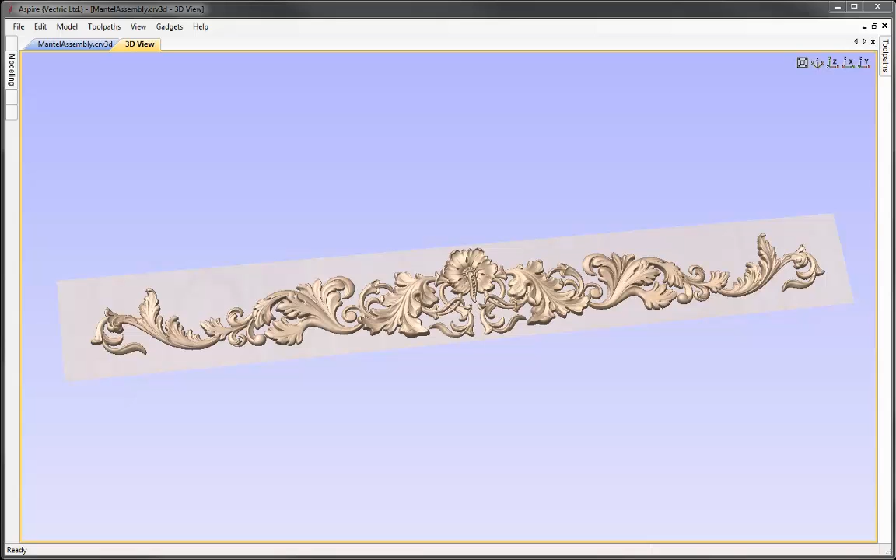So let's go to File, we'll close that, and then we'll go and create a new file. In here we're going to put in some dimensions. For my width I'm going to put in a value of 48, the height is going to be 6 inches. We're going to put Z0 off the top of the block, material thickness we're working with is going to be 1 inch. XY datum position will be in the centre of my job. Working in inches, modelling resolution I'm going to up that to very high so that we have more pixels to play with as we're working with quite a large job space. And then we'll go ahead and press OK.

So to begin this project we're going to start by importing the free clip art that comes with the software. We're going to roughly lay them out, and then we're going to look at the transformation tools to size and position those components until we're happy with a rough layout. So let's go into the 2D view control. We're going to use this option over here to tile our windows horizontally, that way I can see the 2D view at the top and I can see the 3D view at the bottom. So now we're ready to go and import our first piece of clip art.

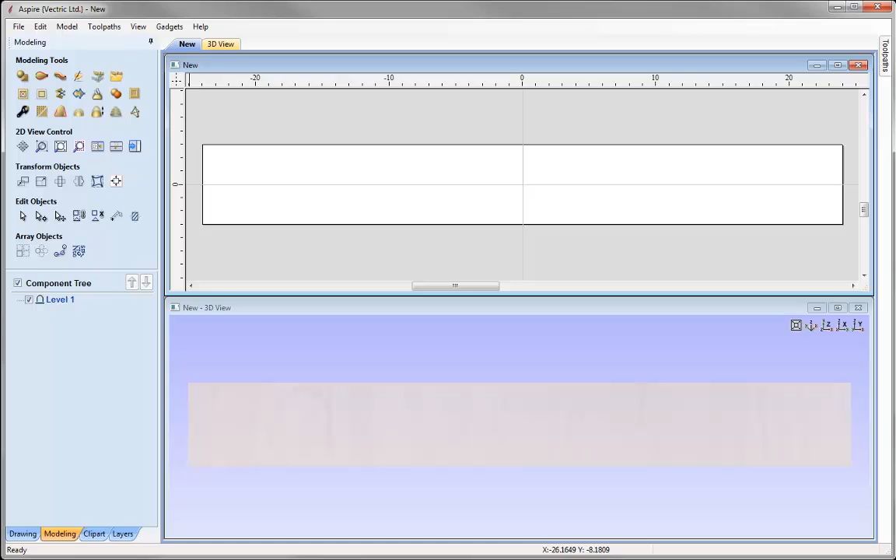So let's go into the modelling tab. There's a few ways that we can import clip art. One way is by using the import option up here and locating the required model from your PC. So let's use that option there. You can see that we're in the Mantel Assembly Files folder, and so I'm going to look at bringing in Flourish 118-57620. So let's take that and then we'll press open. You can see that's been imported into our job.

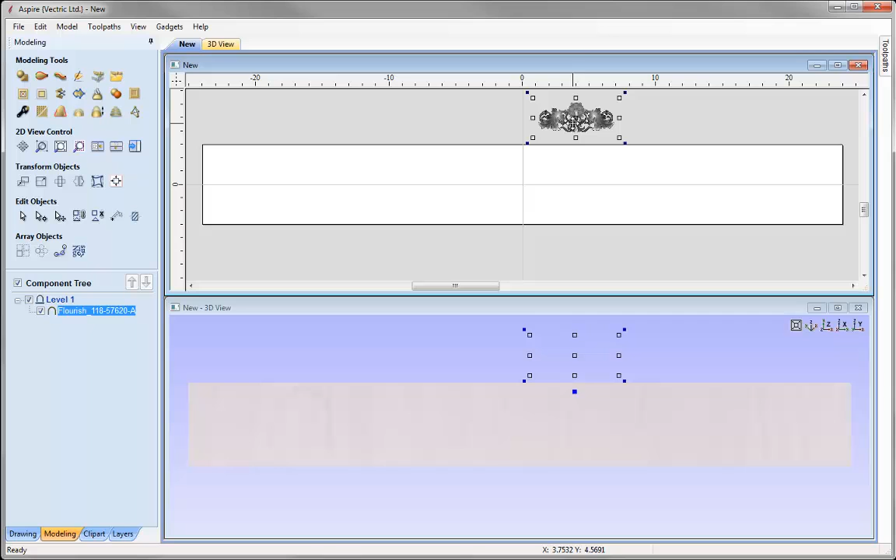So we'll take that and we're just going to put that in the centre of our material. We'll align that to the centre horizontally and vertically to the material, then we can close that down. You can see that my component's been added to the component tree there.

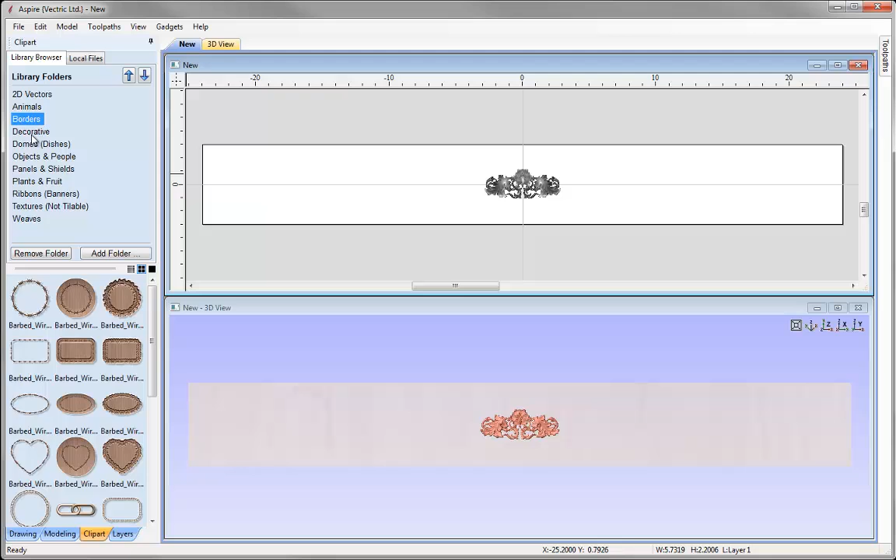Another way that we could bring clip art into our session is by using the clip art tab. So if I just select the clip art tab there, what I've done is I've already installed all of the clip art that comes with the software, and using the library browser option here and using this add folder option, I've added in all of those subfolders that are available with the software, and so I can just click through those and easily browse through the clip art, looking at the thumbnails in the lower half of the clip art tab. There's another way that you could look for your files.

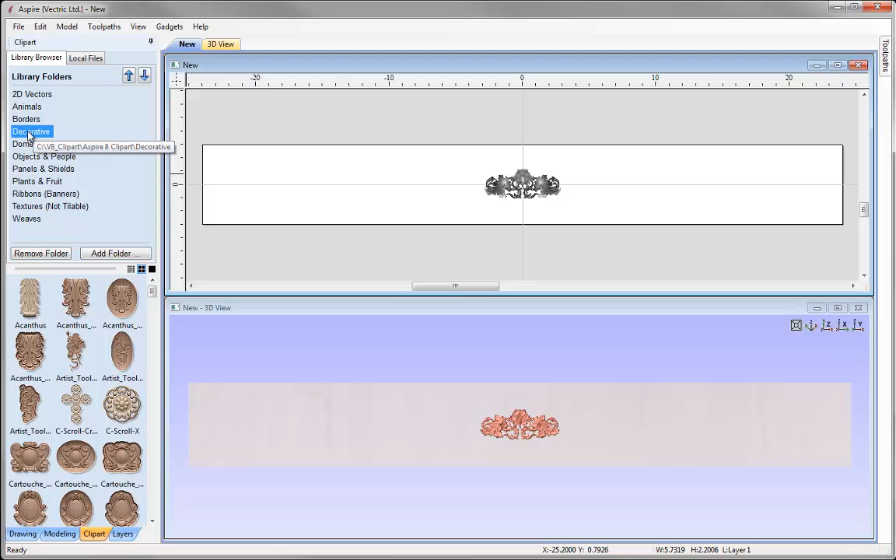You could go and browse through your PC, through your local files, and search for files in here. Now I'm going to go and use the library browser. So I've got all my folders ordered here. I'm going to go into the decorative subfolder here, and then we're just going to browse through until I find a piece of clip art that I like the look of. I'm just going to go through. Okay, so I like this one. I could just double click that and that will automatically put that in the centre. So I could just move that out if I wanted to.

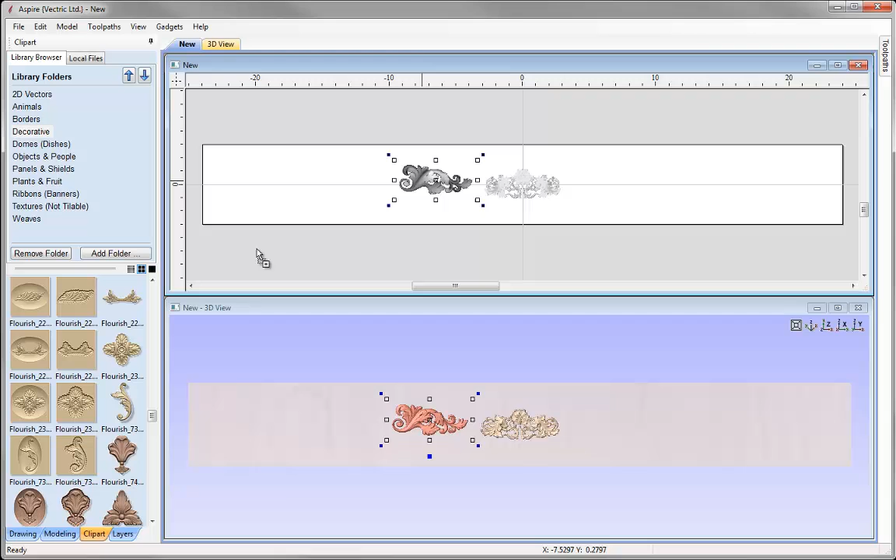And then if we keep looking through, we could find another piece of clip art. So I like this one here. And not only can we just double click clip art to bring that into our session, we can just drag it in either into the 2D view or straight into the 3D view. Okay, so I've got the 3 pieces of clip art that I'd like to use.

So let's go into the modelling tab, and now we'll look at using the transformation tools to alter the sizes and positions of those components until we're happy with a layout.

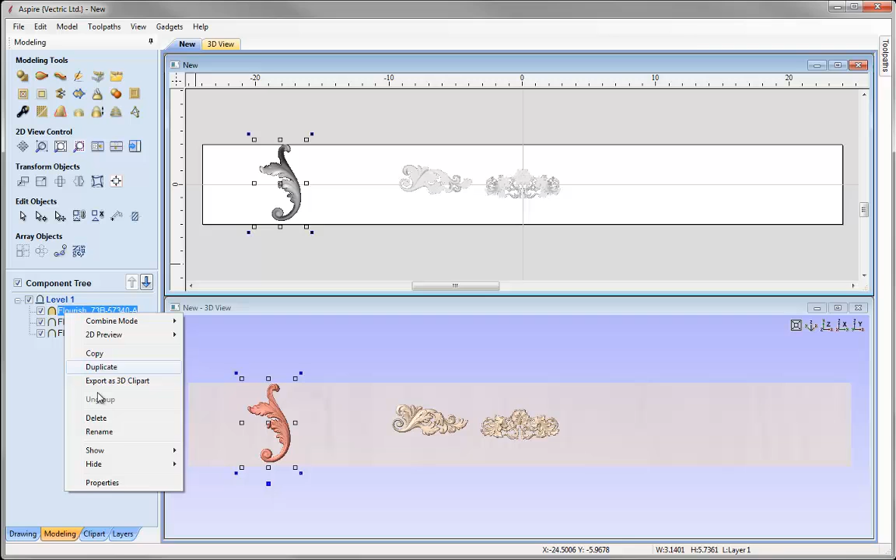Now before we start to lay out our components, I'm just going to rename them all just so it's easier for me to refer to. So I'm going to right mouse click on Flourish 73 here, rename that, we're just going to call that one A. I'm going to select this one, right mouse click, rename that one, call that one B. Select this one, right mouse click, rename that, we're going to call that one Centre, so it's just easy for me to refer to. So now we're ready to go ahead and create our rough layout.

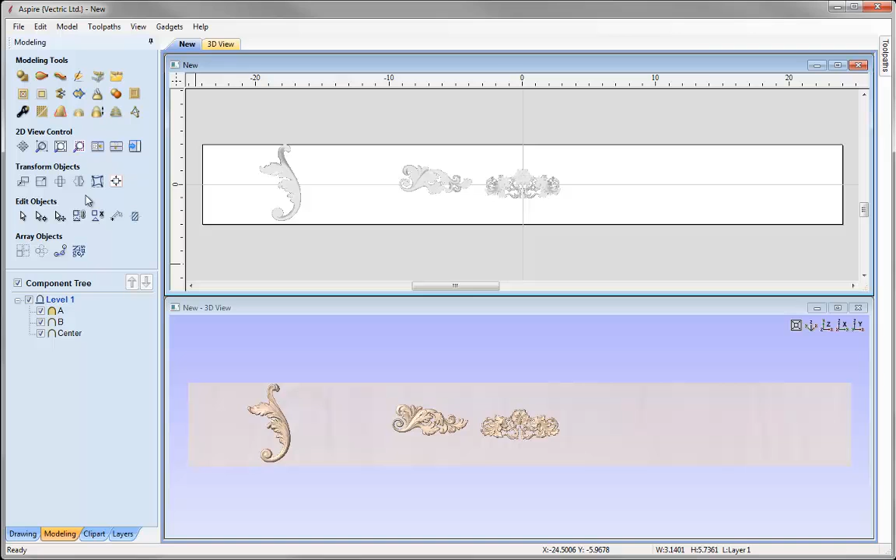So we're going to look at the transform objects tools. We're going to look at sizing them, moving them, rotating them, mirroring them or flipping components until we're happy with a rough layout. I am going to work with just the left hand side of our job here, as what I ultimately would like to do is create my left side, and then as part of the finishing process I'm just going to take the components that we have on the left side and mirror those onto the right. So it's all about just working with as much as you need to - I only need to work with one side if I'm going to create a mirrored copy on the other.

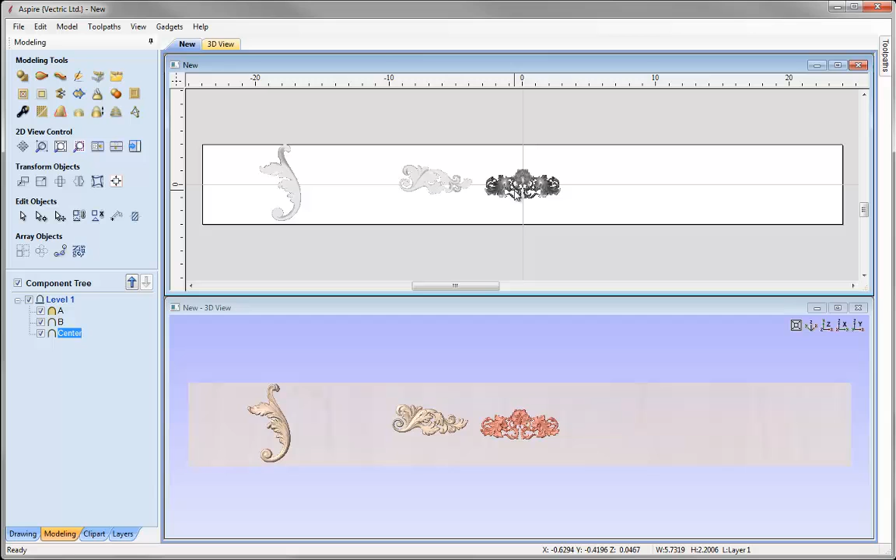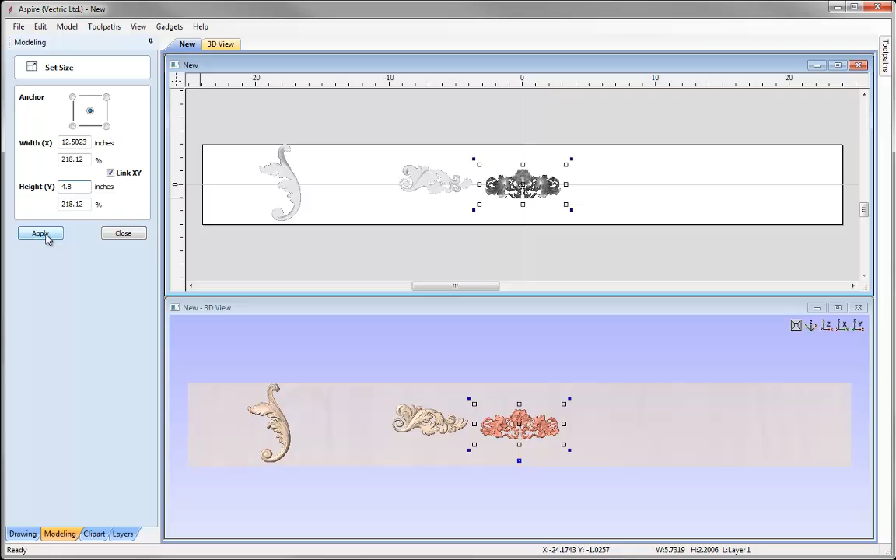So we'll start by looking at this component here, the center component. With that selected, let's go over and alter the size of it. Let's go to Set Selected Object Size, and here we're going to give it a height of 4.8. Let's type that in, 4.8, press apply. I want to make sure Link XY is checked so that it scales up in proportion. Press apply, we can see that's been updated there. So I'm happy with that.

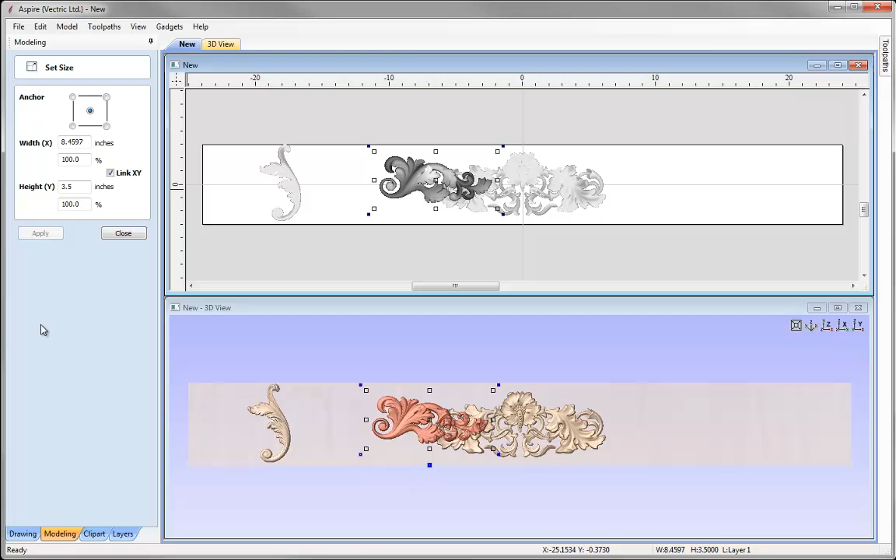I can stay in the set size form and then select my next component, this one here, the B component. Again, I'd like to increase the height of this also, so let's change the height to 3.5. Link XY is checked again, so let's press apply here. You can see that's been altered, so let's just close that.

Now with that component selected, what I'd like to do is flip that horizontally. With that selected, let's go over to Mirror Selected Objects, and we're going to use this option here to flip horizontal. I want to make sure that Flip About Job Center and Create a Mirrored Copy are unchecked. So we're going to use that option here, Flip Horizontal. You can see that's been updated straight away.

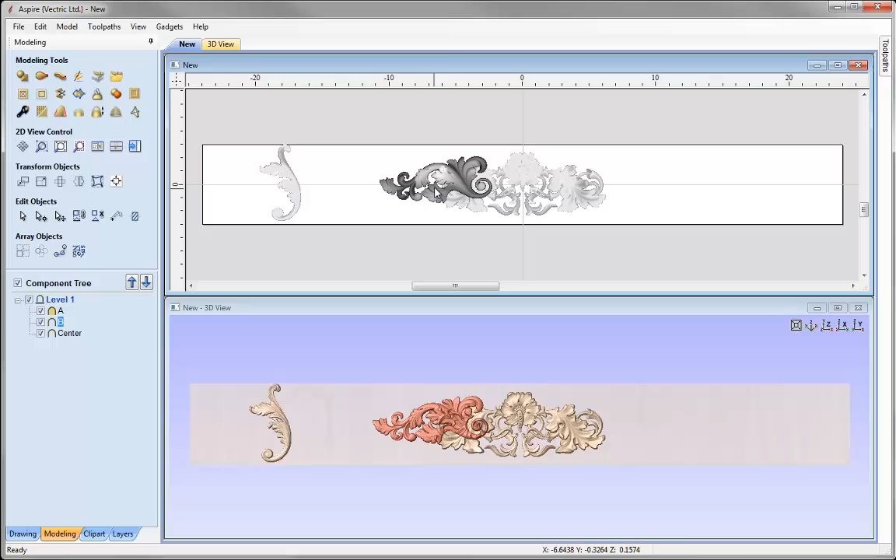Let's close that down. I'm just going to take that and move it out of the way for the time being. To help me see what's going on a little bit better, I'm going to use this option here, the zoom box. I'm just going to draw in a box around the area that I'd like to zoom in on, then right click to come out of that. Then in the 3D view, I'm just going to use the scroller of my mouse to zoom in, pushing the scroller away from me, so I can see better what's going on.

So I'm going to take this component and just roughly position that in place. I want to move that up a little bit. I think I'm happy with that.

So the idea here is where our flourish starts in the centre, you can see that we have a flourish coming up and it's coming down here. And then it's going to join into this flourish here, where this flourish starts at the bottom and it's going to come up and then come down again. So we want to just keep this flow going, this wavy flow.

I might just want to push that in a little bit more, so I'll nudge that over just a little bit and then maybe bring that down also. That's a bit too much. Okay, so I think that's okay, I'm happy with that.

So we could go and move on and think about this flourish over here. To continue that flow, I need to look at rotating this component. With that selected, let's go over to Rotate Selected Objects. Here I'm going to make sure that my pivot point is in the center of the component, so it's rotating about the center point here. Then I'm going to specify an angle, we'll put in 90 degrees, press apply, we can close that down, you can see that's been altered.

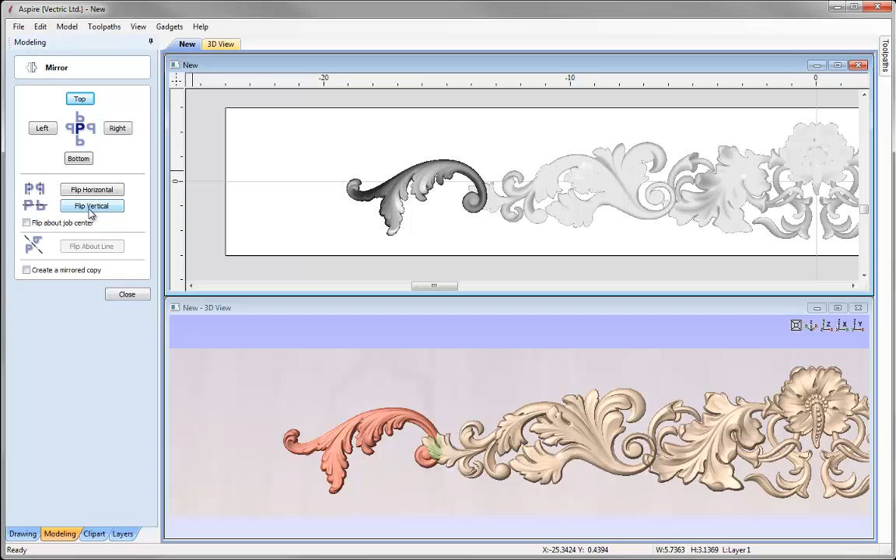So with that selected, let's go over to Transform Objects. We're going to mirror that - again uncheck Flip About Job Center, uncheck Create a Mirrored Copy. This time we're going to flip vertical, close that down, and then I'm just going to dynamically alter this by using the rotation handles and roughly position that in place. Might want to bring that down just a little bit more.

A little bit more there. So I may just want to nudge that over a little bit more and then maybe look at rotating that again.

Okay, so it's just tweaking with your design until you're happy with that layout. And so let's just zoom out a little to take a look at what we've got there. We'll have a look in the 3D view also. So we can see there.

I think I'm happy with that rough layout. And so now we can start to think about altering the overall silhouette of the part. I'm not worried about the heights at this stage where the components are overlapping each other. I'll look at that once we've got our exact layout.

Now, to help me see the part a little bit better, I think it would be a good idea for me to set all of my components combine modes to merge. So I'm going to select A, hold down Shift, then select the center, right mouse click, use the option here, combine mode, and set them all to merge with each other.

So that makes it easier for me to view my overall composite model when they're all blending in with each other.

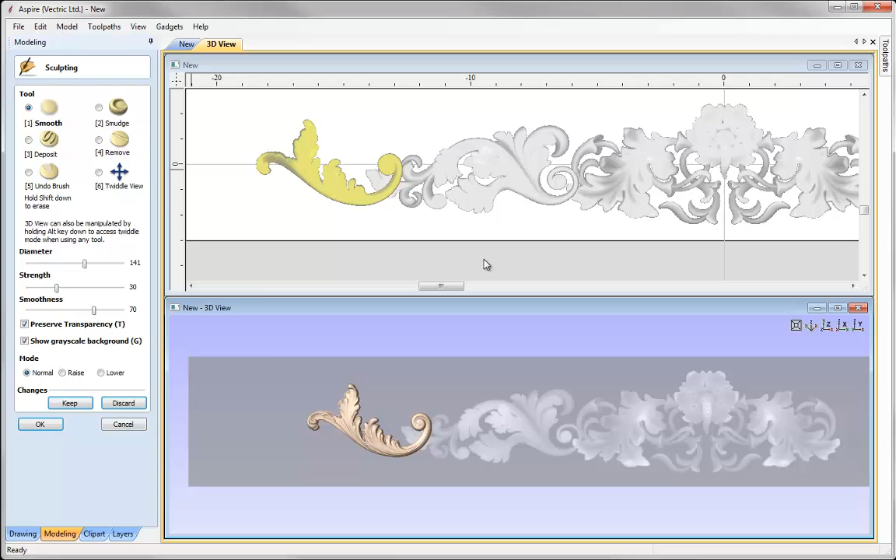So I'm just going to help us out by going into the twiddle view here, and then using the scroll of my mouse I'm just going to zoom in, and then using Control I'm just going to pan that view across. I'm going to use the undo brush option here, so you can see that now we can see the shadow of the other components.

We know exactly where we can cut into. So I'm just going to reduce the diameter there, and then holding down Shift I'm just going to click, and you can see that's removing that for us. So I'm just going to take that off. We can see that that will have cleared the area that's visible up here.

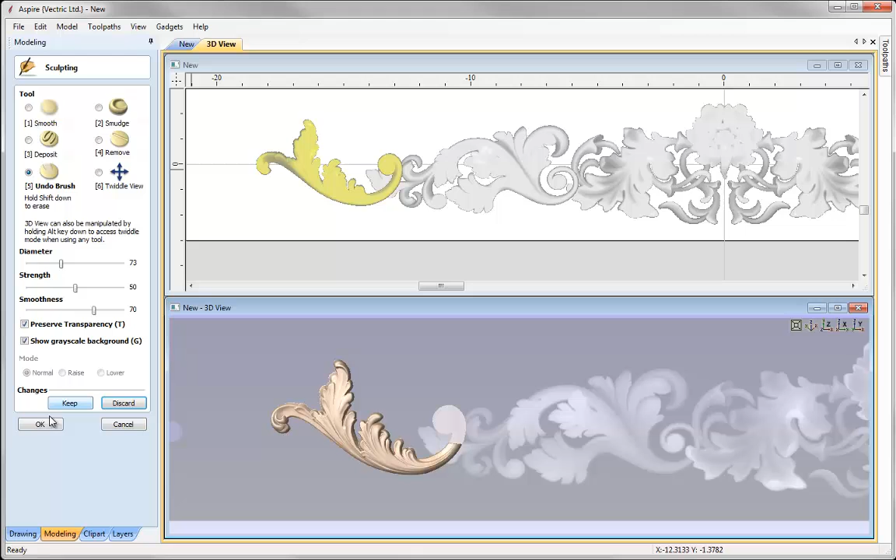Okay, so I'm happy with that, so we'll go ahead and press keep, and then we can go and OK that, and we can see that's removed all of that swirl area here, and so we now have a nice flow running between the two.

Okay, so let's just pop that in Z, then we'll go up into the 2D view, and then just zoom out a little there also. So let's take a look at the overall layout.

Now, it's not too bad, however this end area here looks rather plain in comparison to the rest of the design. Now, it's quite typical of designs to have repeated elements thrown in, so I think to really finish off this layout it could be a good idea to take areas of this component, particularly this flourish area here.

Take a copy of that and put that on the end of our flourish here, just to really set that off. Not only will that set that off, it will just echo elements of the existing design. So to do that we need to draw a vector that represents that area that we'd like to take.

So I'm just going to go into the 2D view, I'm just going to zoom in on that area. Okay, so it's this section here that I'd like. So if we go into the drawing tab, I'm just going to use the option to draw a polyline. I'm just going to start here, roughly draw in an area that represents the area I'd like to copy.

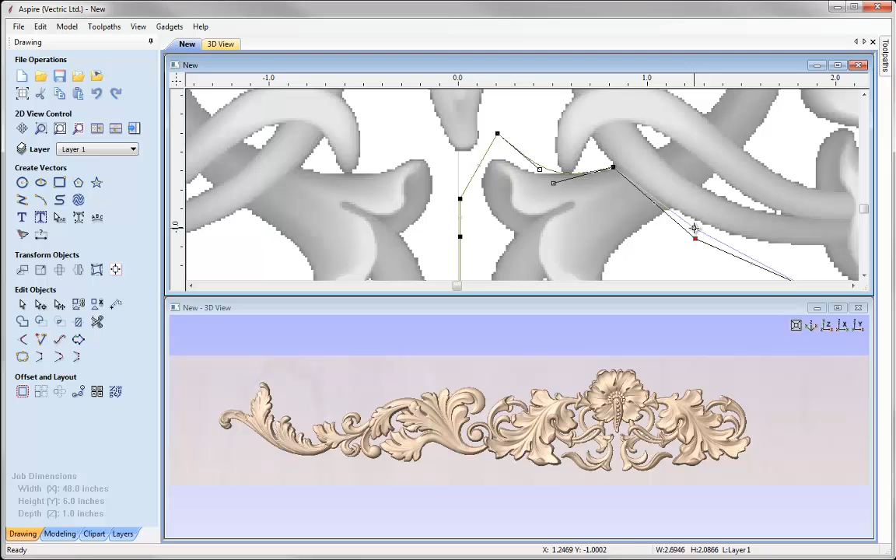Okay, then we'll just join those up. Right mouse click to come out of that. I'm going to select that vector, then go into the node editing options. If I zoom in there, I can really take control of this vector here. A right mouse click, I'll Bezier that span, which enables me to pull on the control handles to change the shape of that span. We'll pull that one out over there, making sure this node isn't cutting into this area. There we go, we have my vector that I'd like to use to crop our component to. I'm going to press F on the keyboard to fit that to the screen.

Now before I crop this component, I must make sure I create a copy of this. So with that selected, I'll right mouse click and use the option to copy. With that selected, let's hold down Shift, select that vector, and go into the Modeling tab. We're going to use the option to clear area of selected component outside of the selected vector, so it removes everything outside the vector we just created. You can see that's done. I'm going to take that vector and delete it as I don't need it anymore.

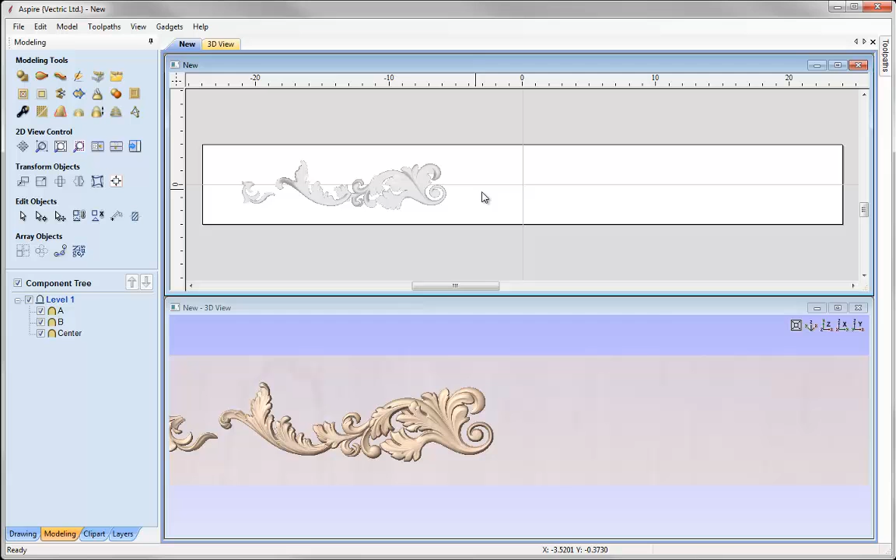I'm going to take this component here and roughly move that over for the time being, then click into the white space, right mouse click, and use the option to paste in my center component. If we move our 3D view over there, we can see we've got our component here, we've got the grayscale, and we can see that's been added to the component tree.

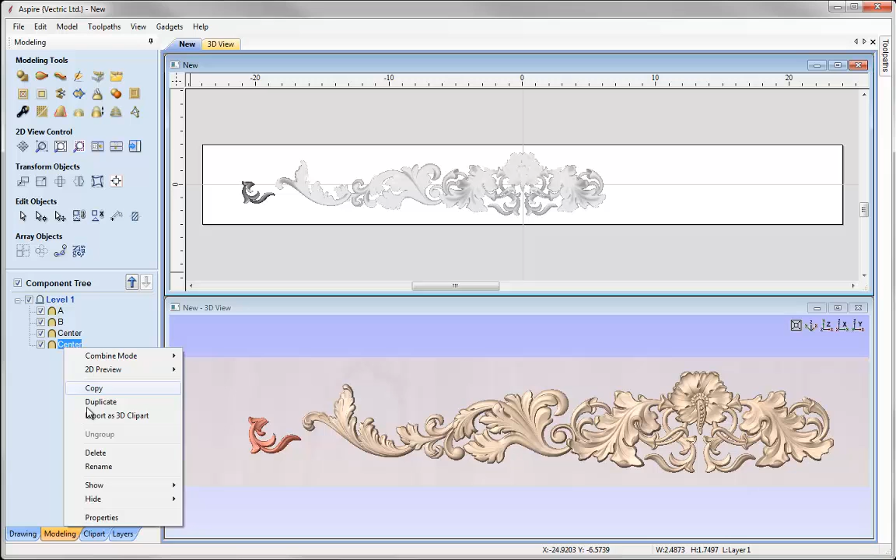Now, so that I don't get confused, I'm just going to rename this new component. I'll right mouse click, rename that, and call it End Flourish. Okay, and then I can go and position that in place.

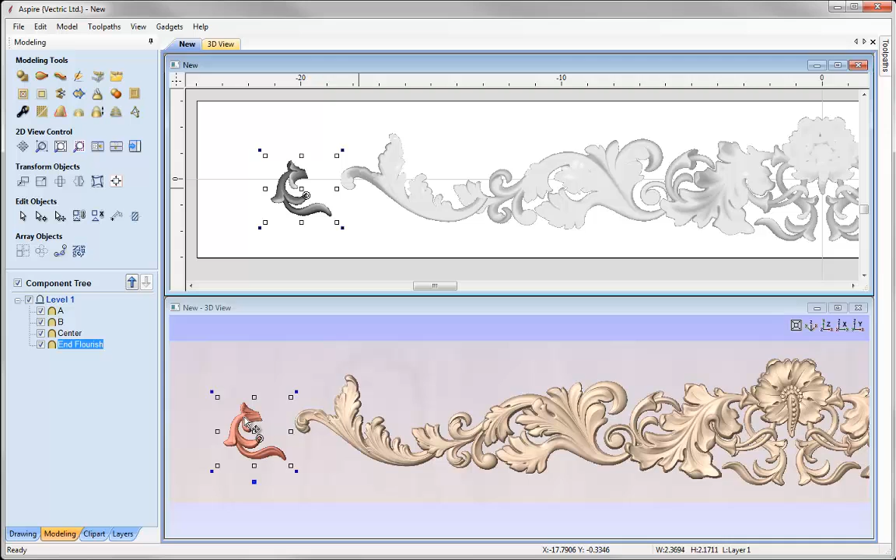Let's zoom in on the 2D view and then zoom in a little on the 3D view. I'm going to take that and select the center to make that my pivot point for when I rotate it manually. If I take one of these handles and rotate that, you can see it's done that there. If I wanted to, I could do this in the 3D view and then manually position that in place.

Okay, I think I'd like to alter the size of that, so let's go to Set Selected Object Size. I'm going to change the height of that and make it 2.5, press Apply, and then close that down. I'll pop that in Z and then zoom in again, and just pan my view across so I can see that a little bit better.

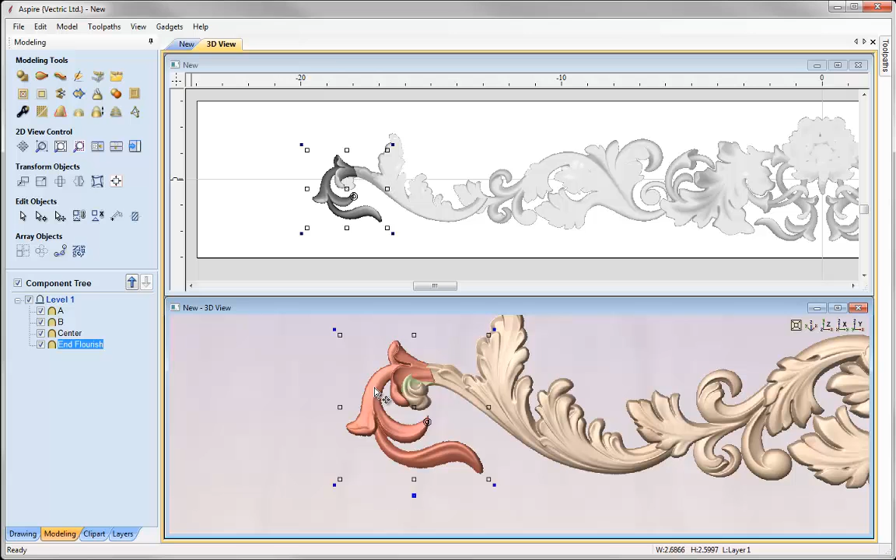I'm going to take that and then roughly position that in place. If I wanted to, I could go and rotate that again, and then bring that out. Okay, so I'm happy with that. Let's just put that back in Z there.

So now that I have my exact layout or silhouette, I can move on and start thinking about the heights of each of those components, and ensure that where components overlap each other, they are either in front, behind, or blending into one another. So I'm going to go and maximize the 3D view to do this.

And then just using the scroller of my mouse, I'm going to zoom in slightly. Then using Control, I'll pan that view across and zoom in again. So I'll start center out, starting with the center component.

So I'm going to select that again to put that into transform mode. You'll notice there is this blue node option here, and if I click on that, it brings up the short properties form. You can see some information about that component - it's telling me its current shape height. Now I'd like to increase that to 0.45, and I'll use the space bar to update that. We can see that's been updated there.

Okay, so now I can move on to the next component. I'm going to select that component there, and I'd also like to increase the overall shape height of this to be 0.4. Then we'll spacebar that to enter it in.

I can see here in this area, if I zoom in, ideally what I would like is this swirl area to look as though it's sat underneath the center component here. Now I could look at applying a fade, where I could fade the entire component from the left to the right hand side. However, I would like to retain the detail within all of this area here.

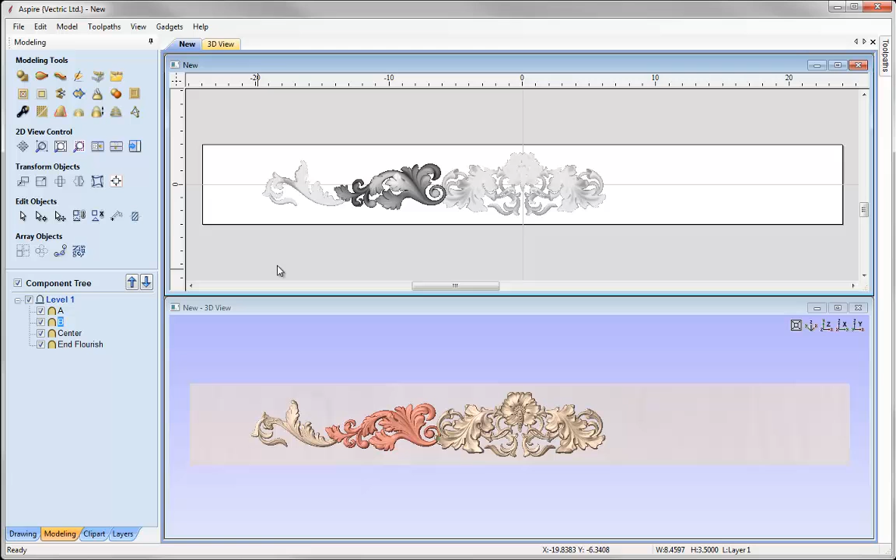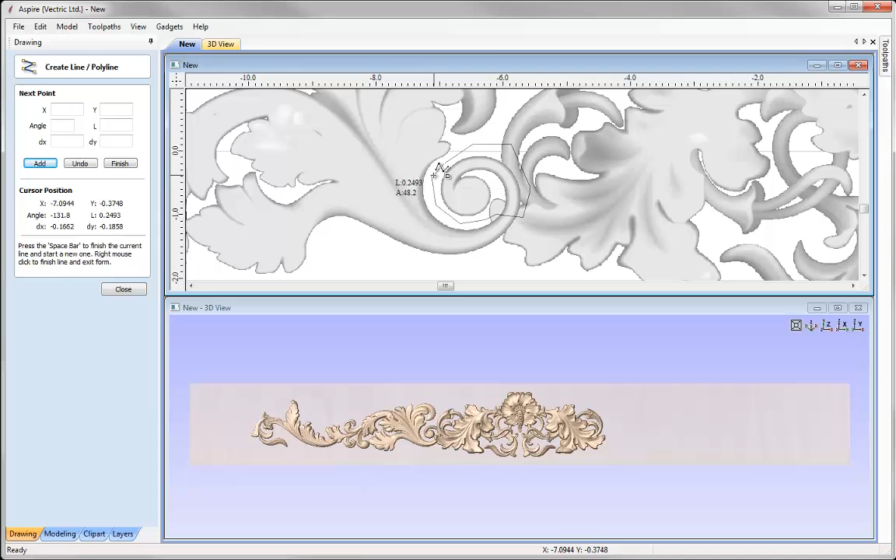Let's close that down, go to Edit, Undo Scale Component Height, and then tile our windows. We'll zoom in, go into the drawing tab, and draw a vector that represents the area we'd like to split. I'm going to draw a polyline, quickly sketching in the area I'd like to split, and we'll close that down.

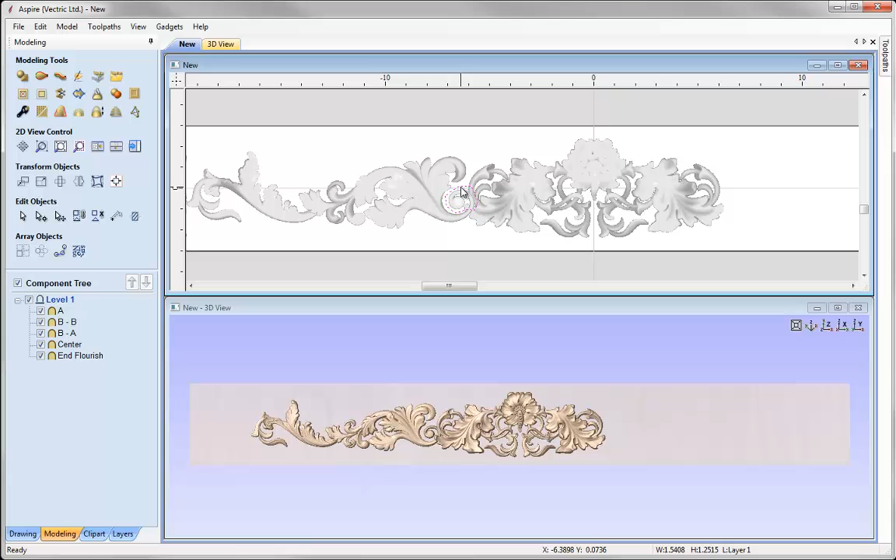If I zoom out slightly, we can select that component, hold Shift to select that vector, and go into the Modeling tab. I'm going to use this option to split the selected component using a vector. I can take that vector now, delete it using the keyboard, and we can see we have two components there, also represented in the component tree as BA and BB.

So to help myself, let's rename those. Right mouse click, rename this one, we're going to keep that as B. I'm going to take the BA, right mouse click, rename that, and we're going to call this one Swirl.

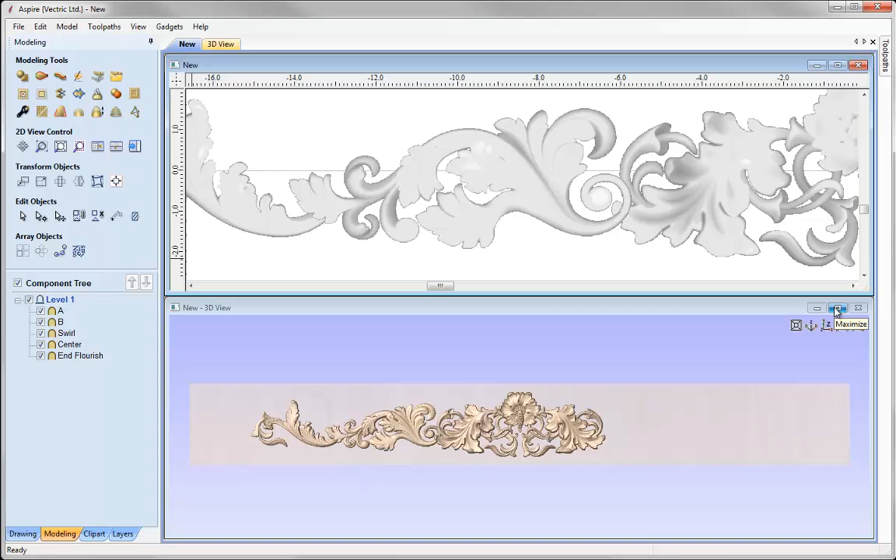Okay, so then we can go back and maximize the 3D view, zoom in and pan my view across, and we can go and alter those heights again. I'm going to take that Swirl, select it to put it into transform mode, use this option to bring up the shape properties form, and then decrease that. Let's try 0.15, and we'll press spacebar to enter that in.

I want to zoom in on the 3D view so we can see that better. Okay, so you can see now that at 0.15, it's sitting completely underneath our center component. So our central component is proud in front of that Swirl. I'm satisfied with that.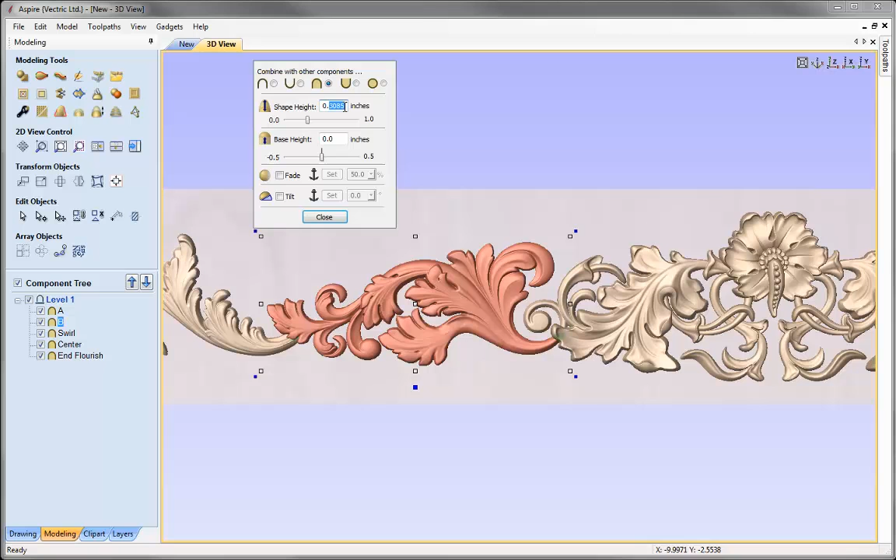So let's move on to this component here. I'll select that one, zoom out a little so we can see how it looks against our center component, then we're going to change the shape height of this one. Let's bring that up to 0.4, press space to enter that in. We can see that's emphasised the detail in our B component.

Let's close that form down. I'm just going to click into the space and using Control, pan my view across. Then we'll look at altering this component here, our A component. I'll select that, and select it again, go into the properties form, dragging that out of the way. You can see our current shape height is just over 0.2, so let's alter that and make it 0.4 so it matches the other components' heights.

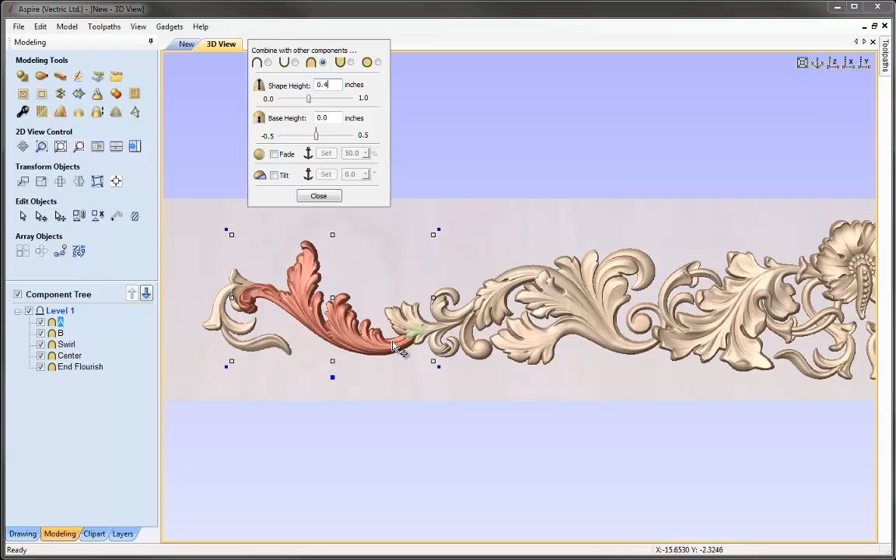Okay, so you can see again that's really emphasised the detail within that component. However, if we take a look on the right hand side here, we can see that component is starting to show through the B component. Now we want this to sit underneath or behind the B component, so we need to look at reducing the height of our A component.

Now we could do that by reducing the overall shape height, or we could just look at specifying an area that we'd like to fade. So what we could do is fade the component from the left hand side to the right hand side, so only the right hand side is reduced. If we use the fade option here, which is this one, we can see now that I'm able to set an anchor point.

If I use the set option, you'll notice the cursor has changed to an anchor with the number 1 next to it, telling me we need to set our first anchor point. This is the point or side of the component that you'd like to remain at 0.4, its current shape height. So we're going to go from the left, I'll click on the left hand side, and now we have an anchor with a number 2 next to it, so that's where we need to set our second anchor point. This is the area or direction that you'd like to fade that component.

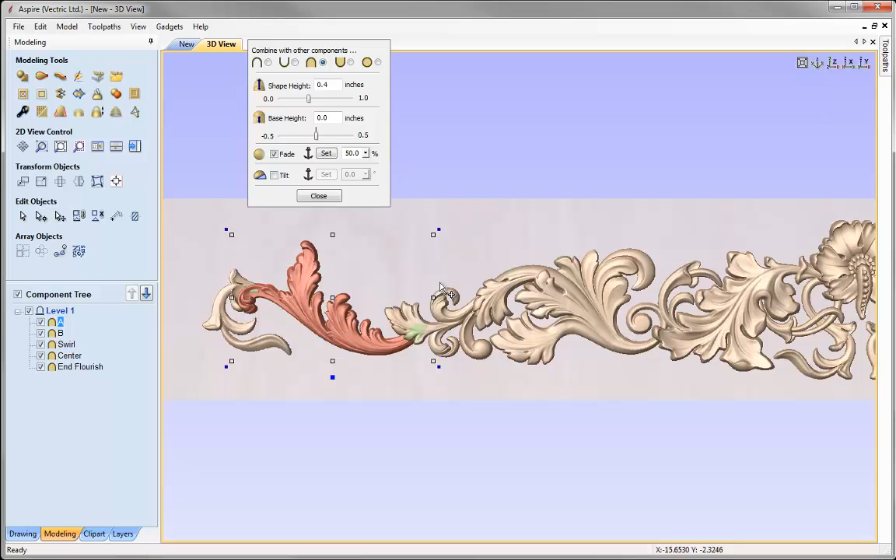So I'm going to click on the right hand side as I want to fade from the left to the right. We can see that's done at a default of 50%, and if we take a look, that's now sat underneath our B component. So I'm happy with that.

Let's go and take a look at the last component, which is our end flourish here. We'll just increase the shape height of that ever so slightly, bring that up to 0.275, and press space to enter that in. Okay, so I'm happy with that.

Again, if we just zoom in and take a look, we can see here that it's still protruding through the A component. Now, rather than me reducing the height of this or even applying the fade, what I'd like to do is retain all of the components' shape height. So I'm going to look at actually blending this component with the A component using the sculpting tools to remove that, so that way I can still keep all of the height within this flourish here.

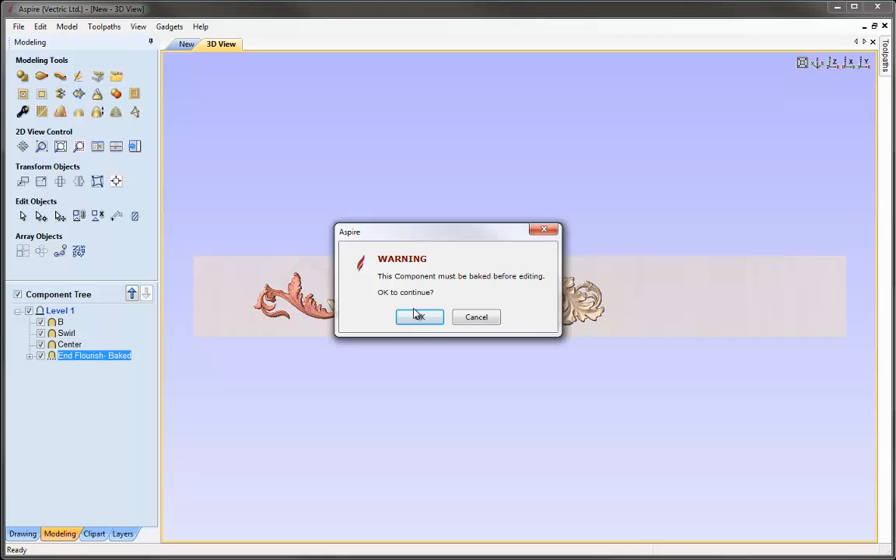So let's just close that down and put that in Z, and then we'll go and hold down Shift and select this component also. I'm going to go into the sculpting tools, and it's going to warn me that we must bake this component before we edit that. I'm happy to do that, so I'm going to press OK to continue. I'm just going to go into number 6, the twiddle view, and then holding down Control, I'm just going to pan my view, and then using the scroller of my mouse, I'm just going to zoom in.

Okay, so all I'd like to do is just blend in this area here. So to begin with, we'll start with the smooth tool, with a diameter of around 30, strength 30, and all I'd like to do is just blend the two areas together to remove this harsh line here. So we'll just do that by clicking, and then I'm just going to hold my mouse down and run that across, back and forth. You can see that's now blending the two together.

Okay, so you can see that's already made a big improvement there. If I wanted to, I could go and use the smudge tools, bring the diameter up a little to around 40, strength around 60, and then look at just pushing the material out a little at the top there, just to give that more of a defined curve area here. And then if I wanted to, I could just pull this part of the flourish out to bring that out a little more. I'm going to go back into the smooth, just reduce the diameter, and then just run over the bottom area here.

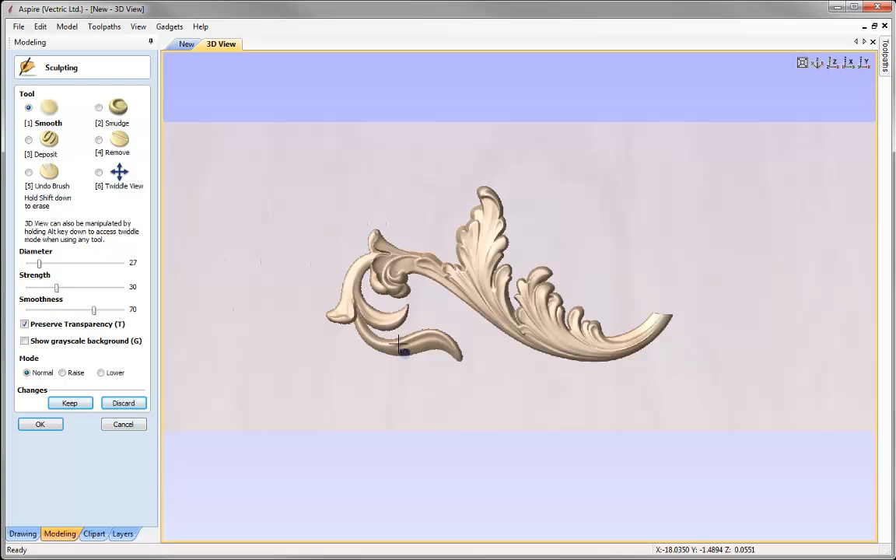We can see that's now blended together, and I'm happy with that. So let's go and press keep, and then we can OK that. Let's just pan that across and zoom out a little so we can take a look at that as a whole. That's not too bad.

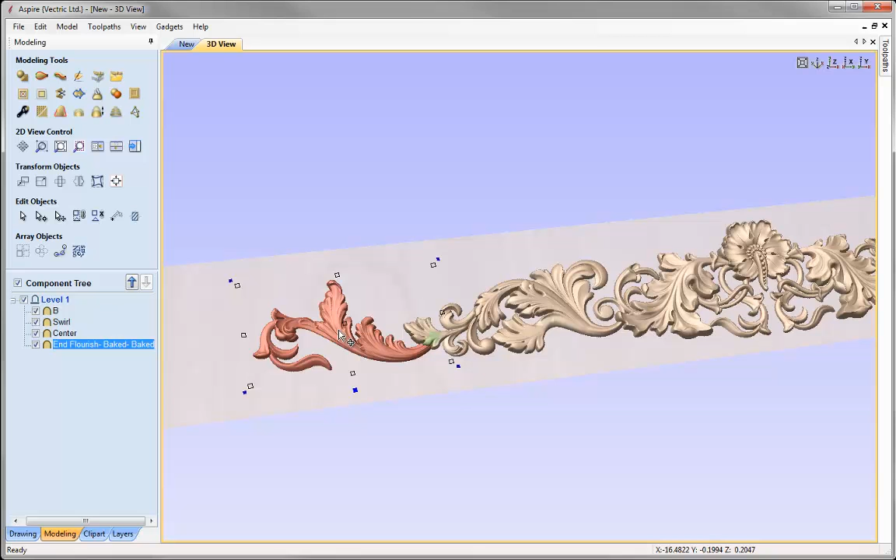However, I think we could benefit from maybe applying a tilt to this component from the right hand side to the left, just to balance that out. So we'll go and select that again, and let's just select the properties option. We'll just move that out the way. I'm going to use the tilt option.

Now we can set our anchor, so we'll use the set option here. Okay, so we need to set our first anchor point. We're going to go from the right hand side, as we want the right hand side to remain the same, we just want to lift up the left hand side. So we're going to set our first anchor point by clicking on the right hand side there, and you can see that the anchor has now got a number 2 next to it, so we need to set our second anchor point, which needs to be on the left hand side. So I'm going to click here, and then we need to choose how much of a tilt we want on that.

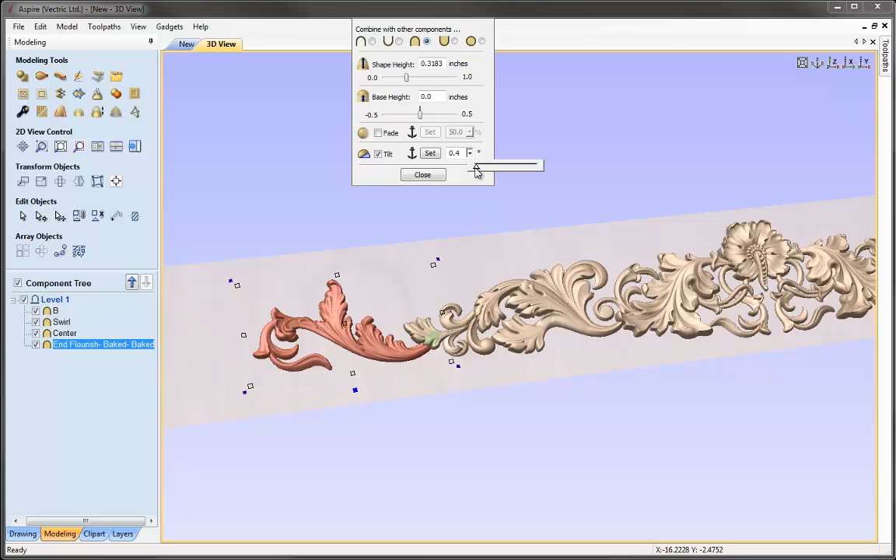Okay, so that's 0.4, we can maybe lift that up a little. Let's try 1 degree. Okay, so that seems to have balanced everything out a little bit better now. Let's just make sure that we're not coming into the B component. We can see that there, it's still sat underneath here, so I'm happy with that.

So we'll just close that down, and then let's have a look at that in the Z view. So we're now at the stage where all of the overlapping areas have the correct heights, where we looked at how using the tilt and fade options and how we could alter the shape height of the components allowed us to create the look that one component is in front or behind the other.

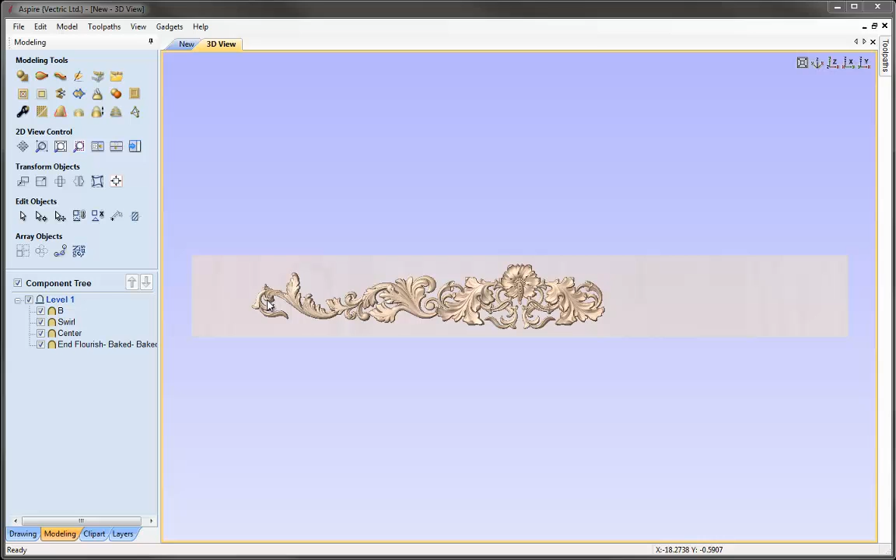So all we need to do now is look at finishing the part, and it's really quite minimal in this example, as we only need to look at mirroring the left hand side to go onto the right hand side. So I'm going to go and select all of the left hand side components, holding down Shift and clicking to select those. You can see we've got that section selected.

Now looking at that, I think it could work as a standalone piece of clip art. So before I go ahead and mirror that, I'm just going to right mouse click and use the option to group them. I'm going to rename that group by right mouse clicking and using the rename option. We're just going to call that Left Flourish.

And with that left flourish, I'm going to right mouse click, and use the option to export it as a piece of 3D clip art. Exporting this as a piece of clip art will allow me to import this into another session of Aspire, and it will still retain all of the individual components.

So this means I've added a brand new piece of clip art to my library of models, and I could look at ungrouping them if I wanted to use the individual components. So we'll go and export that as a piece of 3D clip art. We'll just keep the name Left Flourish, add that to our project folder, press save, and I can easily access that later on.

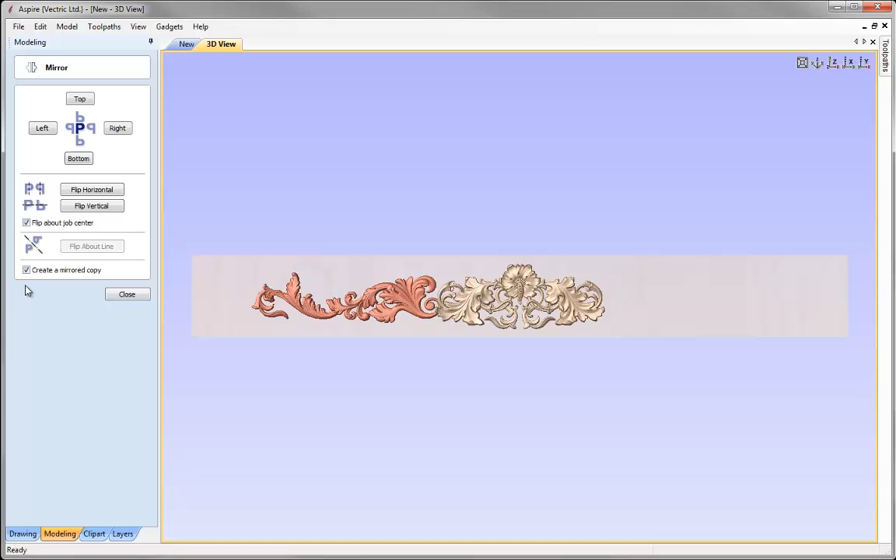Now with that selected, let's go over to Mirror Selected Objects. We'd like to flip that about the job center, and we'd also like to create a mirrored copy. Then we're going to flip that horizontally. Okay, you can see it's done that there. So let's just close that down.

So let's just rename that component, right mouse click, rename that. I'm just going to call that Right Flourish.

And as a final thing I'd like to do, I'd like to take all of those by holding down Shift and selecting them, and I'm going to change the size of that just to really fill out the space that we've got available. So we'll go to Set Selected Object Size.

I'm going to give that a height of 5.5. Make sure Link XY is checked so it scales up in proportion. Then we'll go and press Apply, and then we can close that down.

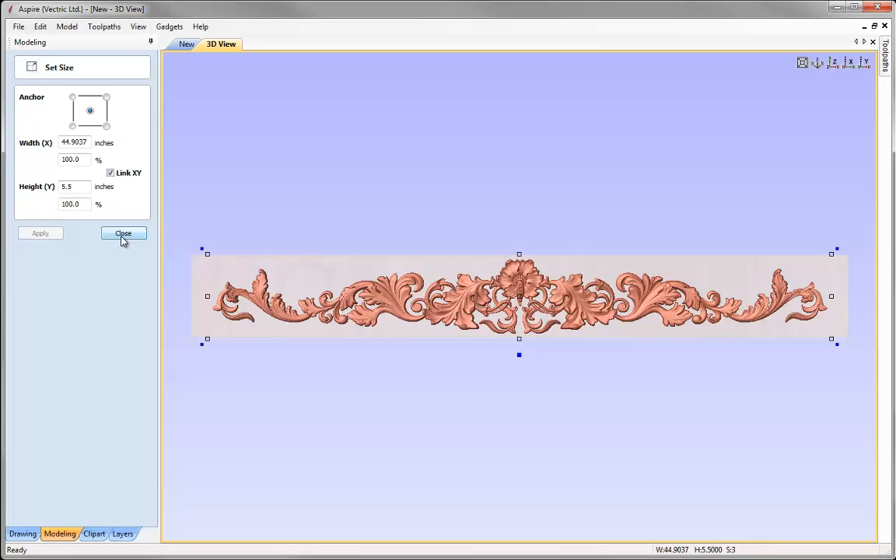With all of those selected, I'm just going to group them. So let's right mouse click, group, and we'll rename that group. Right mouse click again, go to rename. I'm just going to call that Mantel.

And then with that component, I'm going to right mouse click again and use the Export as 3D clip art option, as I have a brand new piece of clip art. So let's save that out as a piece of clip art. We're going to add that to our project folder, call it Mantel, and then press save.

And it's really a good idea to get into the habit of exporting models that you make or edit, as it's a quick way of adding to your own collection of models. And then using the Clip Art tab, if we browse our local files, we're going to find that project folder, Mantle Assembly, and if we go to the files, we can see that they've instantly been updated there, and we have access to all the folders within our Clip Art tab.

And so that really completes this tutorial, where we've looked at some of the powerful tools in Aspire that enable us to take existing models and edit them to create brand new ones. In this particular example, we took 3 pieces of clip art that come with this software, roughly laid them out, and then looked at some of the tools in order for us to create the exact silhouette.

We then looked at ways that we can alter the component's height so that the overlapping areas are either in front, behind, or blending into one another. And then we finished the part off by simply mirroring the part. And you can see that just by using those 3 pieces of clip art, we've created a rather complex model.

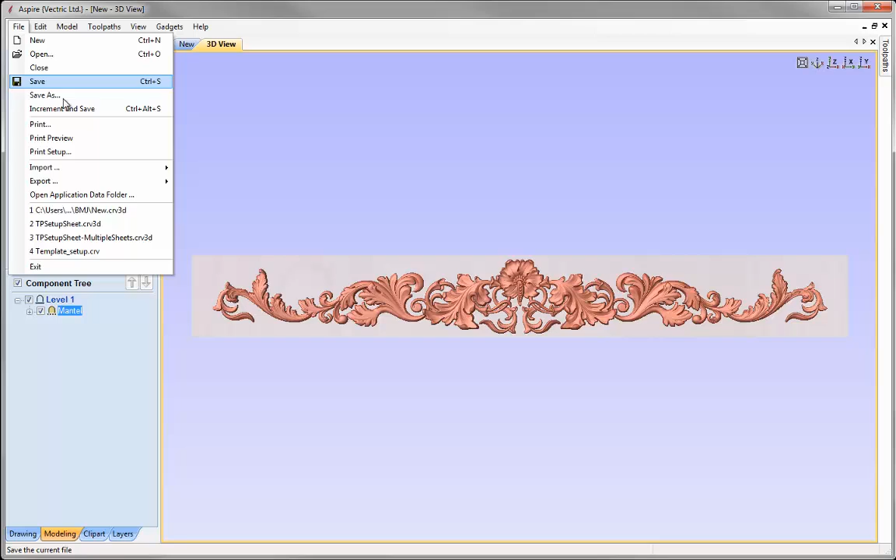So let's go and save that file. Go to File, Save As. In the project folder, we're going to call that Mantle Assembly, and then we'll press Save. Then you can access that from the project folder.